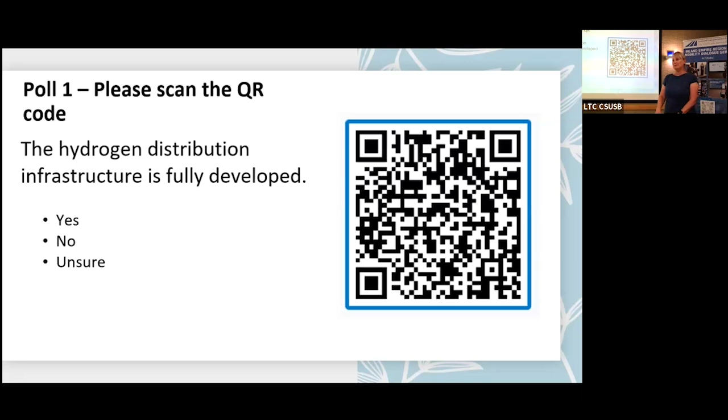So just to get us thinking and starting us off, we have a poll that you can go on. If you're online, you can click in, and if you're here in the room. And so it's, again, they're questions, they're not scientific, they're just to get folks to start thinking about the issues. And one of the issues is the hydrogen distribution infrastructure is fully developed. Pretty sure. Yes, no, unsure.

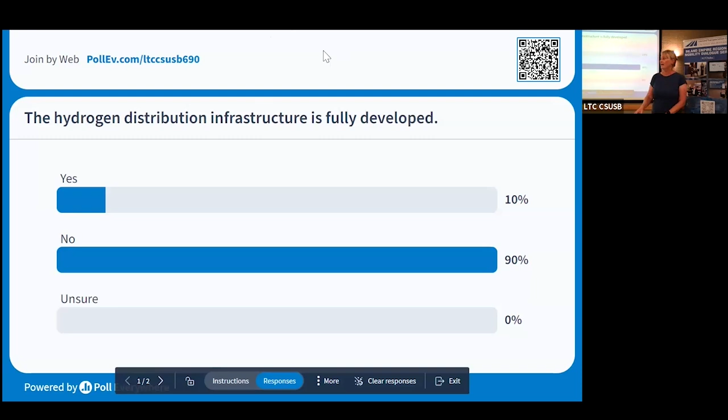I know what I would answer. All right, there we go. 100% no. I knew that. I was worried. I thought we might get some unsures, but yeah, the hydrogen distribution infrastructure is just beginning to get developed, and there's a number of projects out there, and we'll see how our region and the Southern California area works with that. Oh, we have a yes.

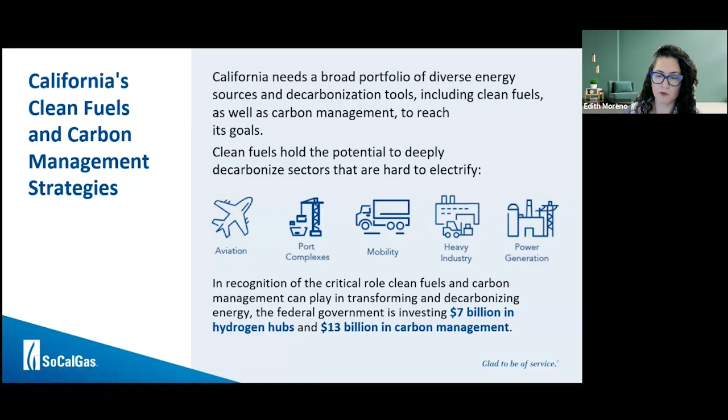We are slated to receive about $1.2 billion in federal funding to facilitate the development of hydrogen hubs in California, which speaks volumes to the amount of policy support and momentum there is. I'm really hoping we can continue to ride this wave of support for advancing clean fuels technology.

So what is SoCalGas' role in developing this? I'm glad we had that poll earlier asking the audience whether our hydrogen distribution network is fully developed. Unfortunately, it's not. I think that's one of the biggest reasons hydrogen today is super expensive, largely because it gets trucked to fueling stations, it gets produced and then gets trucked. But the most cost-effective way to transport hydrogen is via a dedicated hydrogen pipeline.

That is what SoCalGas is actively investing in and studying today. We have a proposal to build what would hopefully be the largest clean renewable hydrogen pipeline system, delivering reliable hydrogen to the LA basin to power the ports and support the heavy duty transportation sector. By providing that fuel to power these sectors of the economy, we could hopefully see a significant improvement in air quality and reduce GHG emissions from the hard-to-electrify sectors in the LA region.

Where SoCalGas is with this project, we're about 1.5 years into what we're calling phase 1. That's about 16 feasibility studies SoCalGas has executed, ranging from where hydrogen would be produced, who would be the off-takers, what's the cost effectiveness of hydrogen, does it make sense to build out a dedicated hydrogen delivery infrastructure system, or is it more cost effective to potentially pursue other technologies like full electrification?

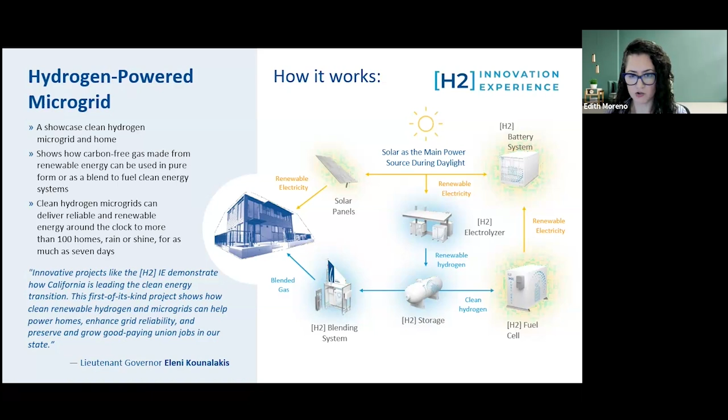So I just mentioned the home, and that's very much just a test demonstration kind of pilot we've set up. But right now we're in the process of hopefully bringing this hydrogen blending project into the real world environment. At the direction of the commission, we were required to join our other utilities, including Pacific Gas and Electric, San Diego Gas and Electric, and Southwest Gas, to propose demonstration pilot projects to collect the real world data that we need to develop a hydrogen blending injection standard.

I think a lot of research today shows that we're pretty safe to blend hydrogen at low levels, but as a prudent operator of the gas system, we want to make sure that we collect actual data.

So what we proposed with the commission are two projects: one with the city of Orange Cove, located in the northernmost part of our service territory, where we have an isolated system that we've identified. And then we also have a project at UC Irvine that will serve their recreation center. UC Irvine is actually a really great leader in the hydrogen space, so we're excited to partner with them and collect additional data and work alongside them to get the data that we need to eventually inform the development of an injection standard.

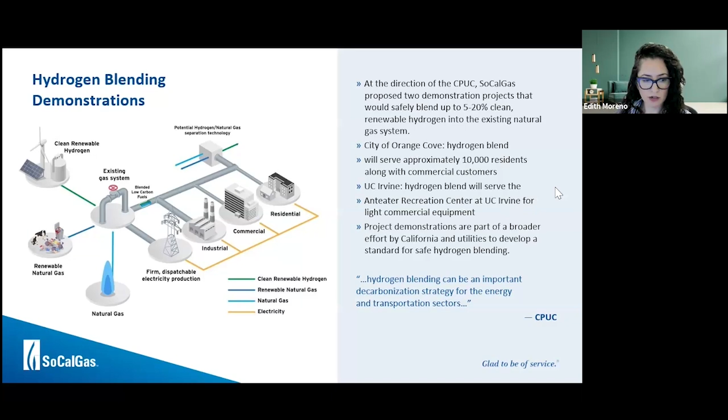I mentioned we've been in the energy delivery space for over 150 years, and SoCal Gas does have a really great workforce to leverage. Our bread and butter is pipelines today, and so the only difference in how we operate is instead of delivering natural gas today, hopefully we'll be delivering hydrogen to our customers in the future.

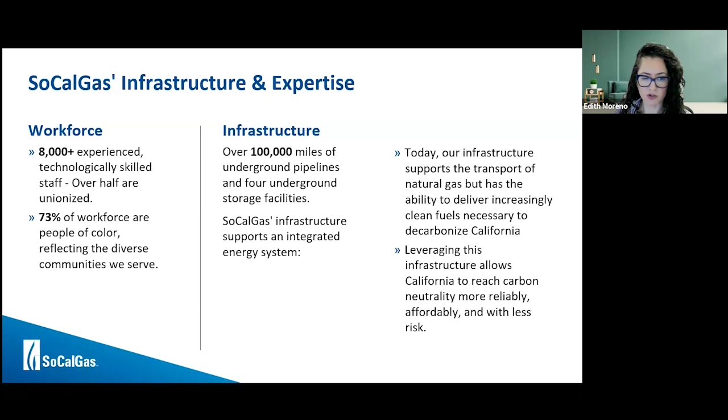Very interesting project. In your overview of the project components, I saw one component is separating the hydrogen and the gas—doing the reverse of blending. I'm just curious what that component is for.

Was the question, sorry, I can't hear very well from the audience. Was the question about injecting the hydrogen into the pipeline as a blend, and then downstream eventually pulling the hydrogen from the natural gas? Was that the question? Yes. So in your overview, there is one component where you are doing the separation of the blended gas back to the hydrogen and gas. I'm just kind of curious what that component is for and why you have that part.

Oh, yeah, I'm sorry if I might have misspoke if it wasn't clear, but right now there's no proposal, as part of our hydrogen blending projects, to separate the hydrogen. I think what I was trying to say is blending is a way to not only lower the carbon footprint of the fuel that SoCal Gas delivers today, but it's also a place where hydrogen producers can put the hydrogen while we work on dedicated hydrogen infrastructure.

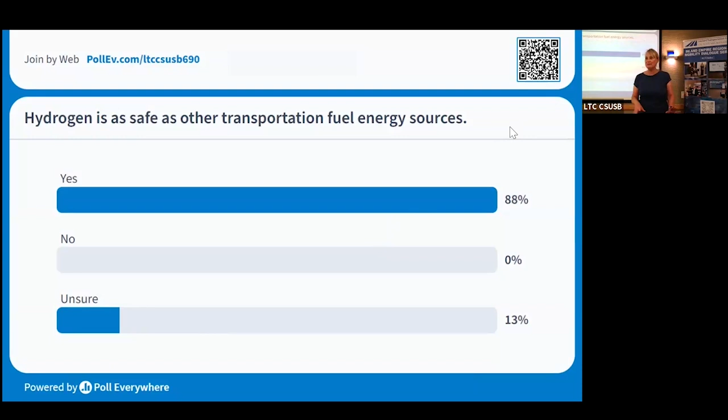I'd like to start off by talking about hydrogen leakage, my past work and my future work. To address the poll question earlier, because I get that question a lot - is hydrogen actually safe? I understand the uncertainty some people might have because it's unfamiliar, and there have been myths about it proliferated throughout society. But I like to remind people that we are constantly surrounded by fuel infrastructure we cannot see, usually in our homes. We also use devices like our phones that have explosive parts and we don't really think of them as dangerous. There was the incident with Samsung in 2016 where you couldn't even take it to the airport. The other advantage about hydrogen is that because it's so much lighter than air, if there is a leak, it's going to disperse much more quickly than a liquid fuel at the gas station, where it can pool - and because it pools, that poses a high risk of combustion. So my opinion is that hydrogen can be safe with the right measures.

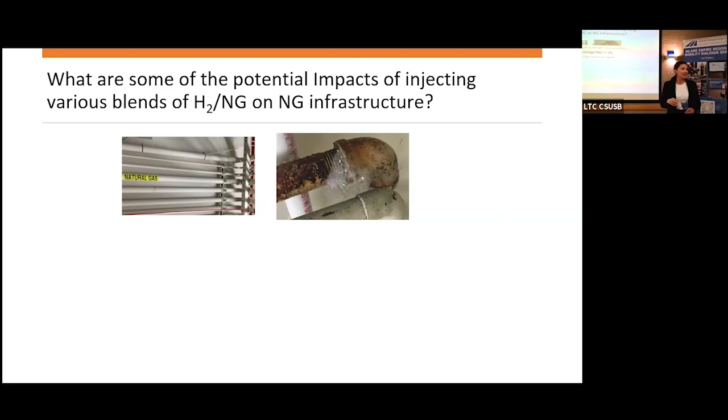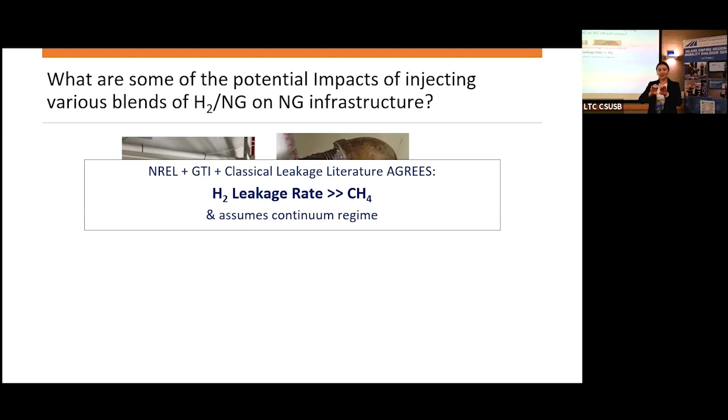But a big concern is leaks, right? Because hydrogen is very small, there are concerns about it leaking from our natural gas system. This was the bulk of my master's work back in 2017, and we really wanted to understand how existing natural gas infrastructure would perform when full of hydrogen - what are some of the potential blends? As you can see, we have all of this infrastructure, and we were really focusing on the after-the-meter infrastructure: low pressure, what you might find in a residential setting or a business with gas-powered appliances, with a lot of joints and fittings. In the literature, NREL, the Gas Technology Institute, everyone agrees that hydrogen has properties that suggest it should leak much, much faster. But this is based on the assumption that we're looking at flows through typical channels. If we have just a very large pipe and we're flowing hydrogen, it should flow much faster than methane because it has qualities that make it much more mobile. If we look at these different flow regimes and different ways of modeling different types of flows, it should leak anywhere from 1.3 to 3 times faster.

But until we actually test this, we don't really know if this is true. What I often tell students in my class, and I think in any kind of setting, is that a lot of the way we use physics and science to understand the world, it's just a model of real systems. So we have to make significant simplifications to come up with reasonable analyses. And sometimes the assumptions we make don't apply, which means our models are invalid. So we wanted to understand this experimentally to really see if this is true.

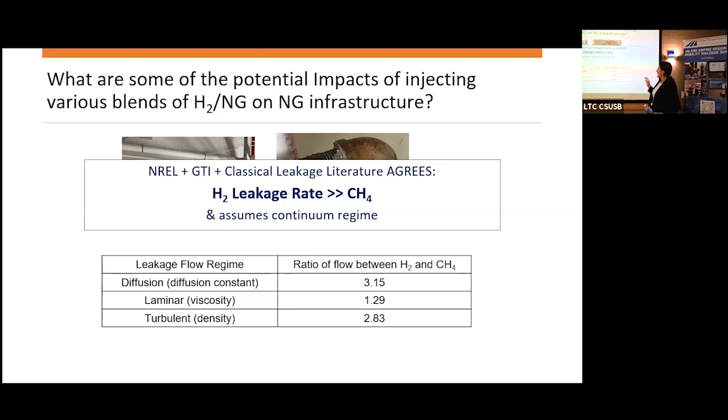I'll also note here that combustible gas leak sensors at this time did not detect any amount of gaseous fuel leakage.

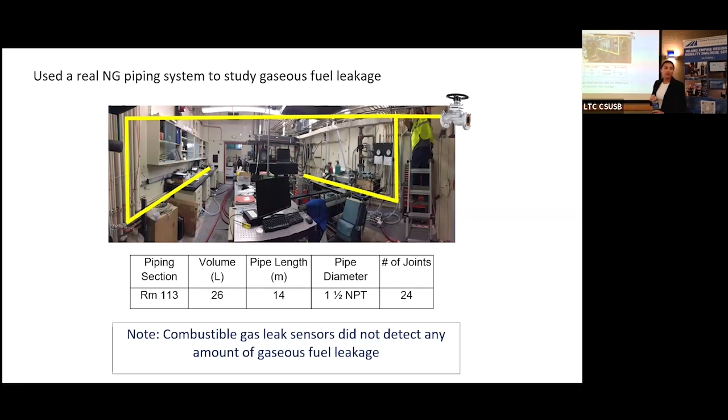So this is indicative that the system is leaking. We don't detect it via olfactory sense, we don't smell the sulfur in the gas, but also our sensors aren't detecting this. This led us to think that likely, the discrepancy between the methane budget, between what's in the atmosphere versus how much we measure, is probably due to a lot of these small leaks that are happening. And methane is a very powerful greenhouse gas, so that's kind of a bad sign.

Second, both the full hydrogen blend and the 10% hydrogen blend show the same initial and final pressure. The rate of leakage is the same for the three blends. We tested this over and over with various different types of equipment because this didn't line up with what was in the literature.

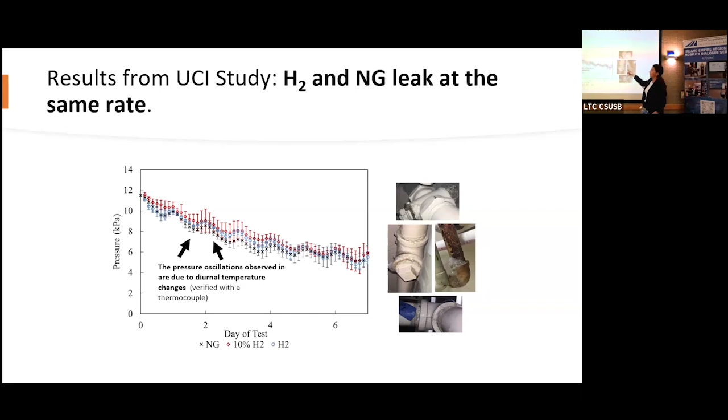When we looked more closely at where the leaks were happening, we realized they were happening at the joints - at the elbows, at the T connections, and if there were any caps or valves, it was happening in those areas.

So then we actually spoke with some people from SoCalGas who were running experiments on 5% hydrogen blends, and they also found very similar behavior, where the 5% blend was showing the same rate of leakage as just the pure natural gas blend - though I think I need to update some of these labels.

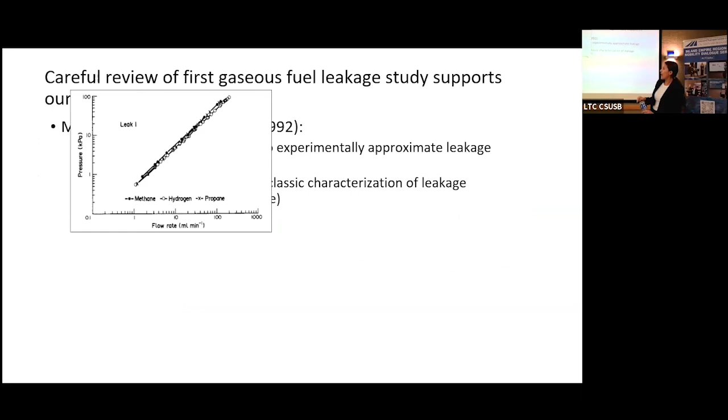We went back into the literature and found a seminal paper by two brothers, Swain and Swain, published in 1992 - a long, long time ago. They used fittings that were given to them by a gas company because those fittings were faulty, and were donated to do assessments on how different blends of hydrogen, methane, and propane would leak. Their findings, surprisingly, were very similar to our own.

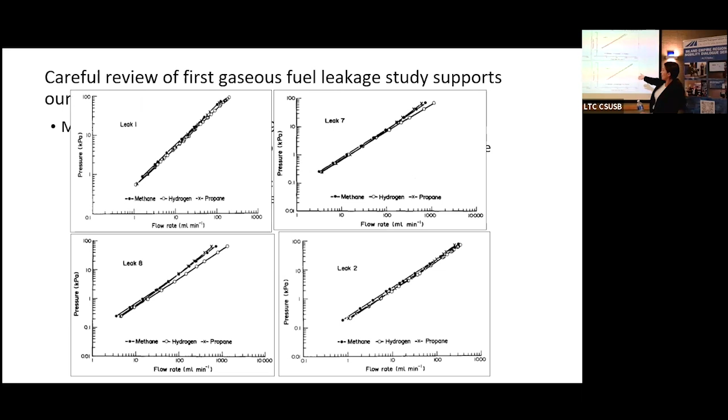So this is one leak, a second leak, three, and then four. You can see that methane, hydrogen, and propane all show the same behavior if you look at pressure versus flow rate - for the same pressure, the flow rate is the same. But classical thermodynamics and classical fluid mechanics suggest that shouldn't be the case. We should see something more like this, where there's a deviation.

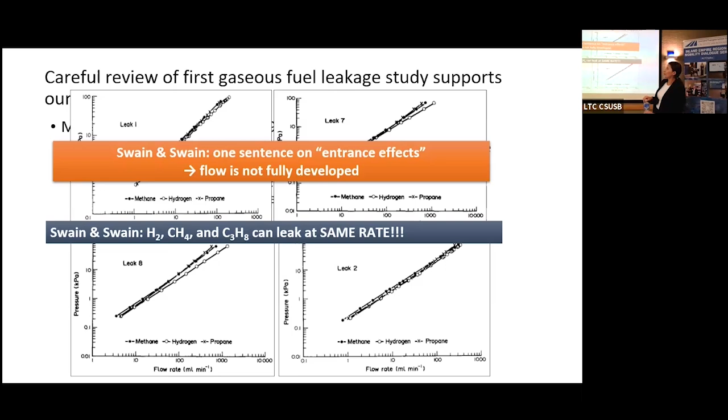They attribute this to entrance effects, saying it's happening because the flow is not fully developed, and therefore the assumptions break down. So we wanted to test this ourselves to see if lowering that entrance length would impact the flow rate. But if anything, we found that it actually makes it worse. If we make the length of the tube very, very small, the difference in leakage is significant and even greater than what these models would suggest. So it was definitely not these entrance effects.

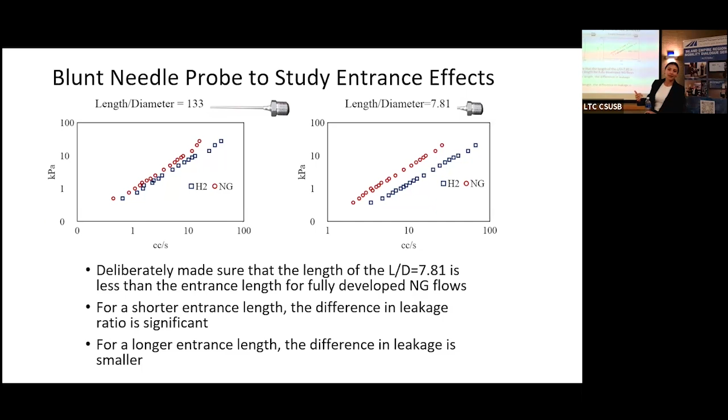So we went back to look at what is actually happening. We know that the leaks are happening in the areas where the joints are. So what about these joints and faulty fittings makes it so we can't approximate the flow as though it's a perfect channel? We started to realize that classical fluid mechanics assumes the flow is steady, falling under ideal regimes like laminar flow, where we can ignore density fluctuations, viscosity changes, and the behavior of molecules at the wall boundary. But when you look more closely, a leak is happening at the boundary of the wall, so there's some kind of interaction between the free molecules flowing and the edges of that pipe. That's an assumption that becomes quite significant.

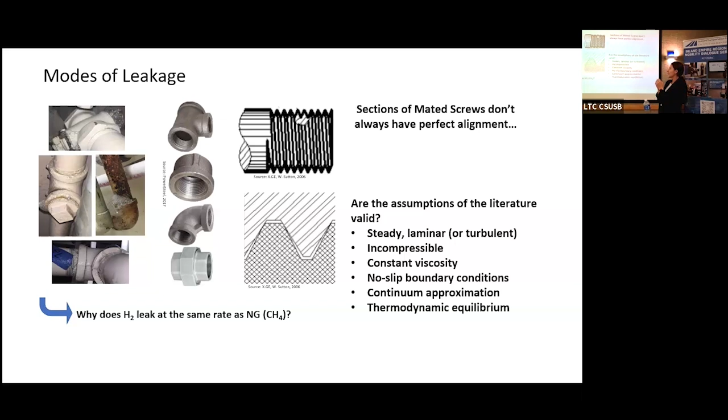One of the key assumptions in these macroscopic big flows is that you ignore that the flow is made up of actual small particles. But really, when a leak happens, it's not that your entire gas leaks all at once. You have tiny molecules that find their way and separate from the bulk gas and enter the wall, that little crack in the wall. So suddenly the molecular nature becomes very important.

So this suggests that leaks can't be represented as a smooth channel where we have flow through a pipe. Rather, we have to account for the deviation from equilibrium and the significant interactions with the wall boundaries. So we proposed the two-step mechanism.

The first step is that you have molecules freely moving around, like the air in this room, just kind of moving and bouncing everywhere. First, these molecules have to enter the leak crack - that's step one. Hydrogen is still more mobile, so it could be entering and leaving at a much faster rate, but the net effect is still going to be the same.

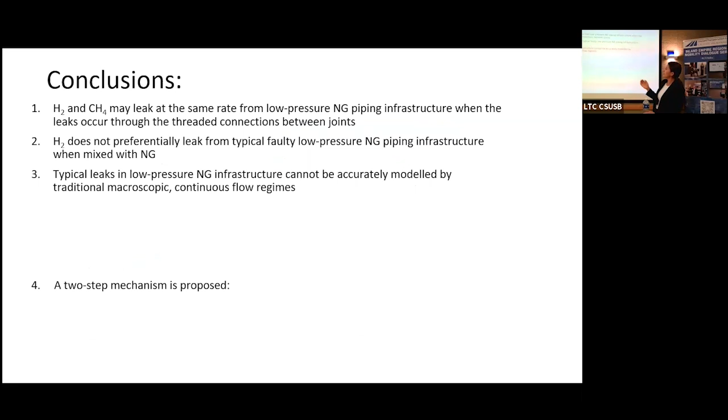So these were some of the conclusions: hydrogen and methane may leak at the same rate from low pressure natural gas infrastructure. Hydrogen doesn't preferentially leak - if we have a blend that's mixed, the hydrogen won't leak faster than the methane. Typical leaks cannot be modeled in macroscopic continuous flows. We propose a 2-step mechanism.

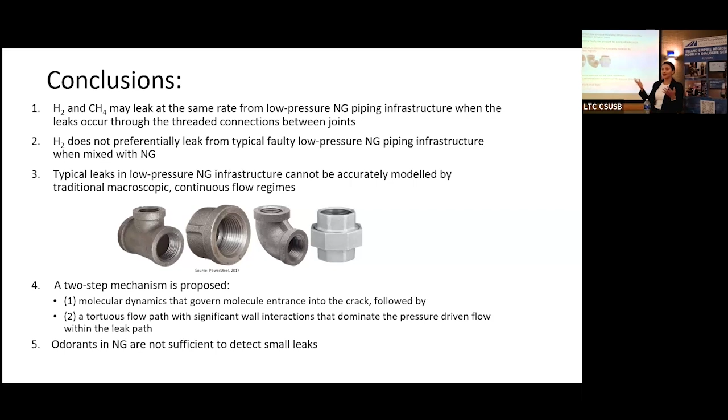Finally, odorants in natural gas are not sufficient to detect small leaks. I don't think these leaks really pose a danger in terms of potential ignition, but more that there's a lot of gas that we might just be leaking without even noticing or really accounting for. There's a paper that I published on this.

At Cal Poly Pomona, I'm planning to continue this work by assessing the leakage rate of various different materials, because we only looked at low pressure infrastructure, but there's also the distribution and transmission systems, and plastic pipes that are used mainly for hydrogen. More work on examining the fundamentals, like mechanisms of leakage, as well as looking at the idea that we can use underground storage for storing hydrogen - how can we better understand that, and what could be the potential leakage that could happen?

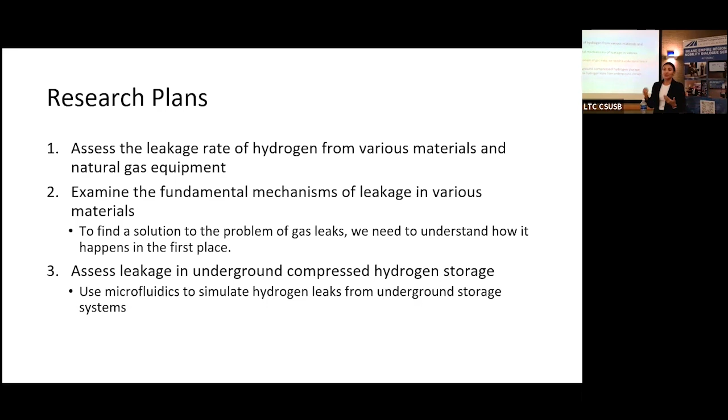This is really important because hydrogen can be a controversial fuel right now. In the atmospheric science community, there's a big concern about the short-term climate impacts of hydrogen. But because we don't have quantitative evidence that understands how much hydrogen could potentially leak from the system, these models are only as accurate as the assumptions they're based on. Without assumptions based on actual science, it makes these models not as strong as they could be. So I think there's an opportunity to reconcile some of these tensions around hydrogen, and leverage these findings to address misconceptions surrounding hydrogen that exist today. With that, I'm happy to take any questions.

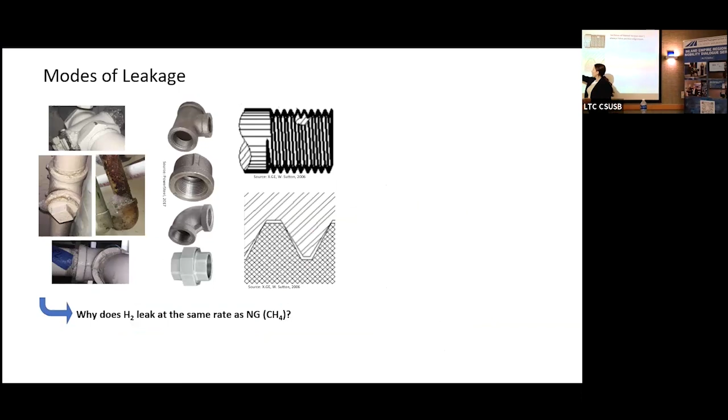Just curious, when you say there's leakage, is it just when you go through different topography or alignment, like going straight versus having a bend in the pipe? Is that leakage consistent just with hydrogen, or how about the blend, and how about methane? If you put methane through a change like an angle, does it leak, or does that only happen mostly when you put hydrogen or even the blend? Yeah, so for all three gases, they're all leaking from the same fittings, and they all show that they're leaking the same. There's no difference in behavior between the hydrogen, the blend, and the natural gas — they're leaking at the same rate, from the same places.

Heard you say you're going to be doing additional studies on different materials for containment or transmitting hydrogen. Are you familiar with any new materials that are maybe stronger than what they use now, for example in the Class 8 trucks? They have these huge, heavy containers so they can maintain the pressure necessary to economically transfer and utilize the hydrogen. Yeah, that's a good question. I'm not familiar with storage materials — in a truck, that's more storage. I'm more familiar with materials used in pipes, and I know that for hydrogen, typically plastic pipes are what's preferred in industry.

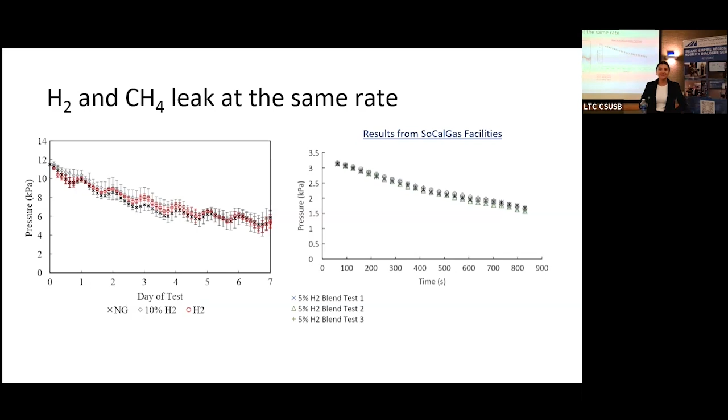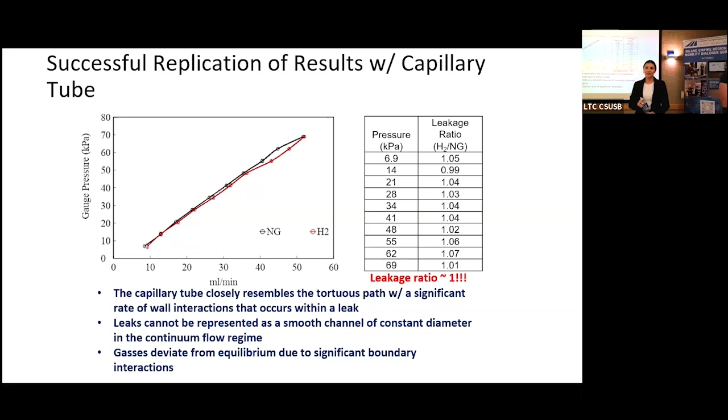Transmission, yes — that's looking at vibration in the pipe and how that affects things. No, but that's a great test to look at. So the question was about leakage when filling, when you're filling the dispenser. Yeah, I don't know the mechanism, so I can't answer that truthfully.

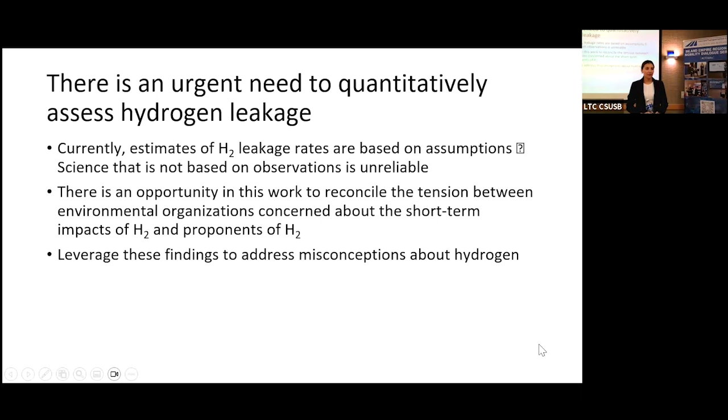So my question is, how much can this problem reduce the effectiveness of the buses we're going to be looking at, or what kind of strategies are implemented in the buses for this type of issue? So hydrogen is just like any other fuel source — it's probably similar, they have a special nozzle so you don't have the release, but there's release when you go to the gas station, right? There's releases from the nozzle, so you'd have to see what the nozzle and its protections are. Then it generally goes into a fuel cell, so it's powered differently — the engines work differently. Is your question about the problem of leakage and how this could impact the deployment of hydrogen?

From an economic standpoint, that's a really good question. Hydrogen today is really, really expensive. The Biden-Harris administration set a hydrogen earthshot — the last earthshot was to get to the moon — and for hydrogen, the goal is to bring it down to $1 per kilogram within a decade. Today, hydrogen is significantly more expensive than methane or any fossil fuels. Part of that is because the equipment used to make hydrogen renewably, called electrolyzers, which split water into hydrogen and oxygen, is at a high technology readiness level but still expensive today, and it's barely entering the market.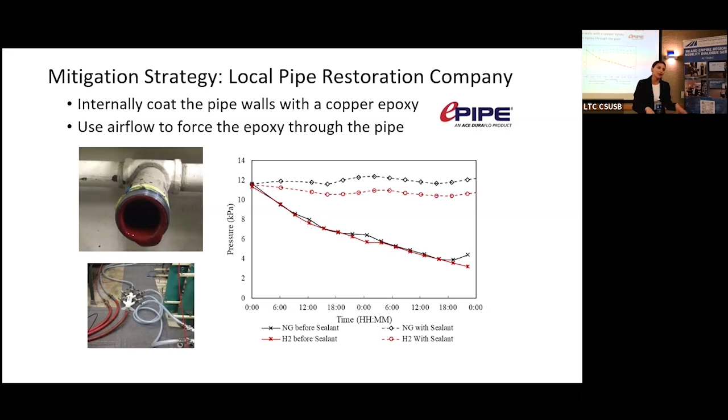The question is, is there a cost to the blend, or is it the same price coming across to the consumer? Because the hydrogen is more expensive than the natural gas. So what is the cost changing?

That's a really good question. What we have in Downey is just a SoCalGas facility. Right now there's no cost to anyone aside from just SoCalGas operating that. If we ultimately get approved for the pilot project, and develop a hydrogen blending injection standard that the state needs to adopt, the pricing we'd still have to determine, because it's going to be very dependent on how much hydrogen production we have online and how many customers will be receiving the blend. I can't give specifics, but today we're just pulling natural gas from SoCalGas's system and producing the hydrogen on site. So the costs there are essentially the water costs we get from the city of Downey, plus SoCalGas's operation and maintenance costs for that setup.

But ultimately, in a future where hopefully we'll be delivering hydrogen blended fuels to our customers, there's still a lot of uncertainty on what that rate impact would be. It'll be several years out until we get information from the pilot program. We then go back to the state of California, or the Public Utilities Commission specifically, with our proposal for a statewide hydrogen blending injection standard. My best estimate is maybe five years or so, and in that time frame we'd be going through the tariff changes and rate changes associated with the hydrogen blend into the system. I hope that answers the question.